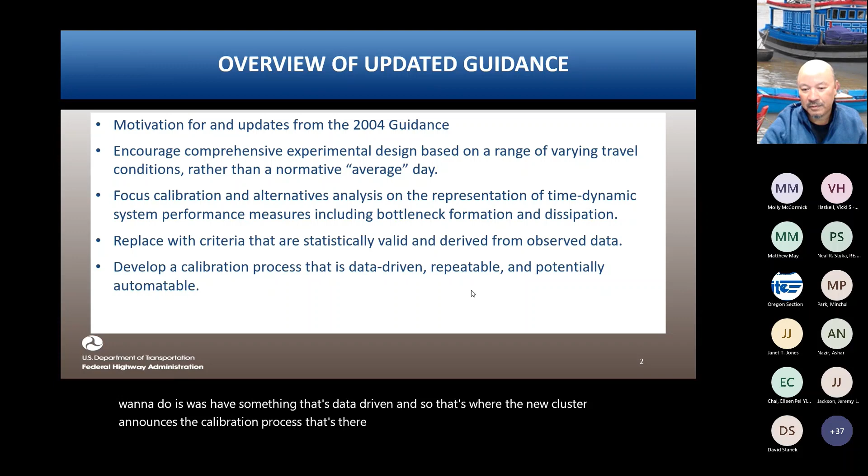What we wanted to do was have something that's data driven. And so that's where the new cluster analysis and the calibration process come in. And what we're hoping for through this process is a repeatable and automatable process. And so here's some of the motivation. Back in 2004, we were data scarce. Now there's plenty of data out there.

And now the biggest thing here is we want to get away from that average day where we're grooming the data. We're spending a lot of time on that. Now we just want to focus on what data are out there, and go from there. And then leveraging some of the new data sources, everything from crowdsourcing to commercially available data within the system. And so those are the things that we went through.

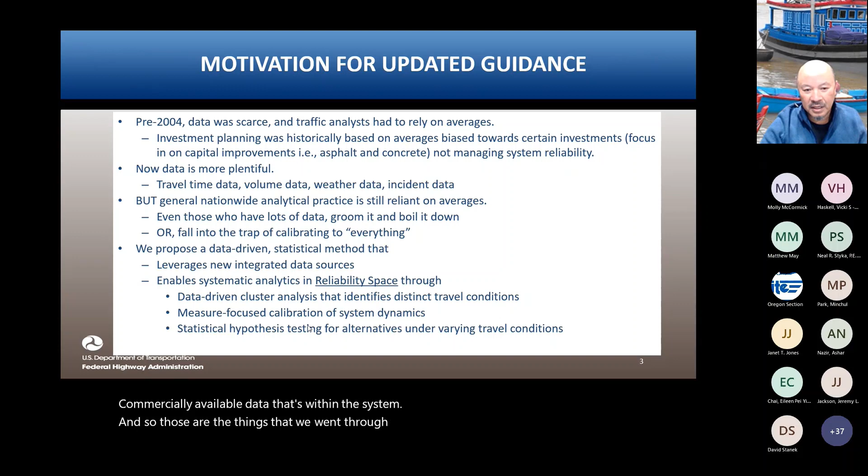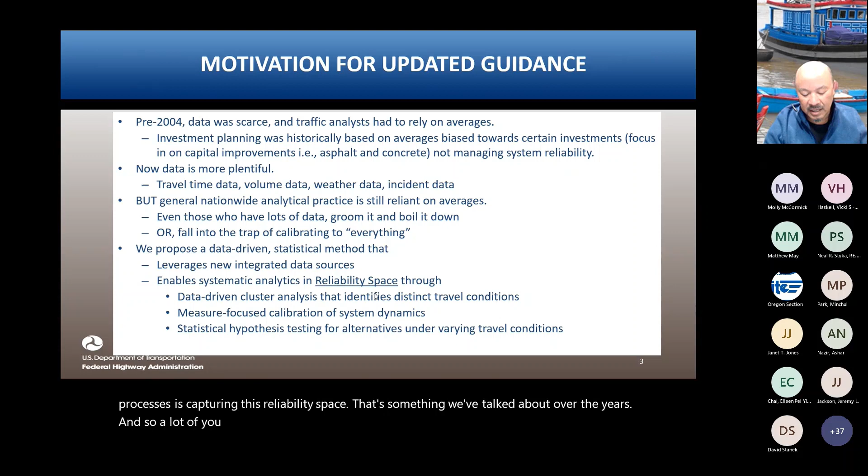And one of the big things in the new process is capturing this reliability space. That's something we've talked about over the years. A lot of the activities that you're doing with microsimulation are still focused on geometric, but the new methodology allows you to also expand into that reliability space.

And so some of the guiding principles of microsimulation here are clear objectives, hypotheses, well-defined performance. When we say objective and hypothesis, we want to get away from the NEPA process, the mom and apple pie, improving congestion, those big broad terms. We want to get into very specific objectives within the modeling process, and how we use the performance measures to vet that. Select the appropriate tool, make sure that we have sufficient budget from a resource and time standpoint, and sufficient available data.

The biggest thing that you will see in the new update is we ask for a year's worth of data, but we can live with 100 days. But we have done projects with less than that, and so it's a matter of what the objective of your project is, how much data you really need, and whether there is data available out there.

And I'll give some examples of some of the innovative ways some of the firms have gone out there and secured the data. Everybody thinks that they've got to go out there and put a tube across the highway for 100 days or a year. That's not what we're looking for.

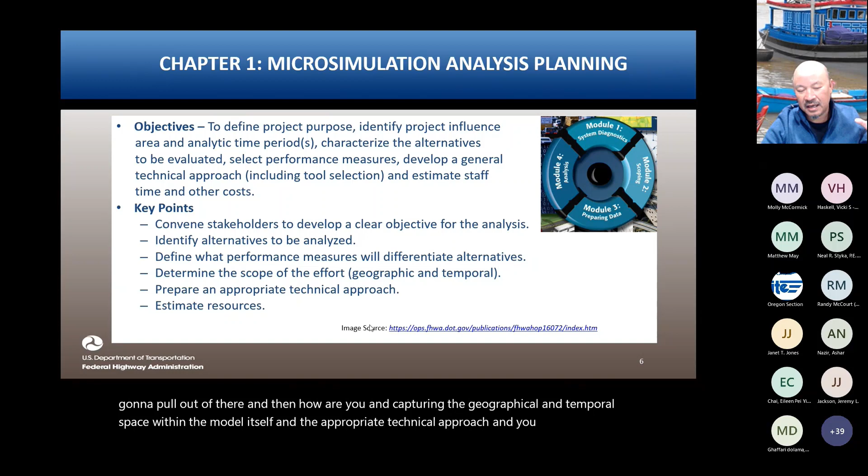Identifying how you differentiate between the no-build and the build. What MOEs are you going to pull out of there? And then how are you capturing the geographical and temporal space within the model itself, and an appropriate technical approach. Those are some of the key activities that we talked about in Chapter 1.

In Chapter 2, that's where we get into the data collection and analysis. And this is the new piece, identifying the different travel conditions within your network, and using cluster analysis to identify that. And one of the big things out of here is measure flow and estimate or forecast demand. The biggest thing that we were looking for is this concept of flow conservation. If you look at the speed-flow curve, there's a direct relationship between demand and speed.

What we want to do is capture a holistic day. And that's one of the things you'll find in the new methodology: we don't calibrate to a synthetic day, but we actually calibrate to an existing or actual day in space that has that flow conservation we're looking for, using contemporary data to understand how your system is doing.

So some of the dangers of applying a data scarce method in a data rich environment. When we did the research and updates in 2016, this is what we found: people were throwing out bad weather days, crash or incident days, and focusing all activities on Tuesday, Wednesday, and Thursday, forgetting Monday, Friday, holidays, and the day before holidays. If you throw away all those bad weather and incident days, you're throwing away over two-thirds of your data. So if you're telling the traveling public you're only analyzing one-third of the days within your network, how would they feel?

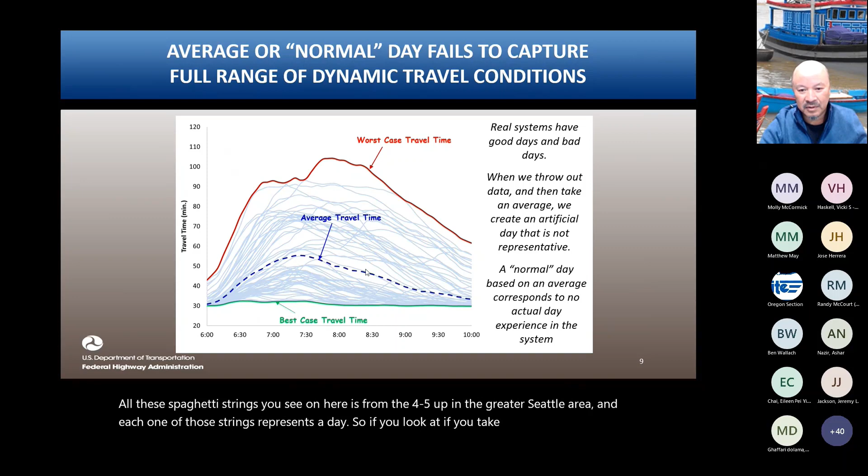Here's all these spaghetti strings you see, from the 405 up in the greater Seattle area, and each one of those strings represents a day. So if you take that average travel time or average day there, are we forgetting all the stuff above that, like the worst case or best case travel time? Those days actually occurred within space, so is it appropriate to discount that?

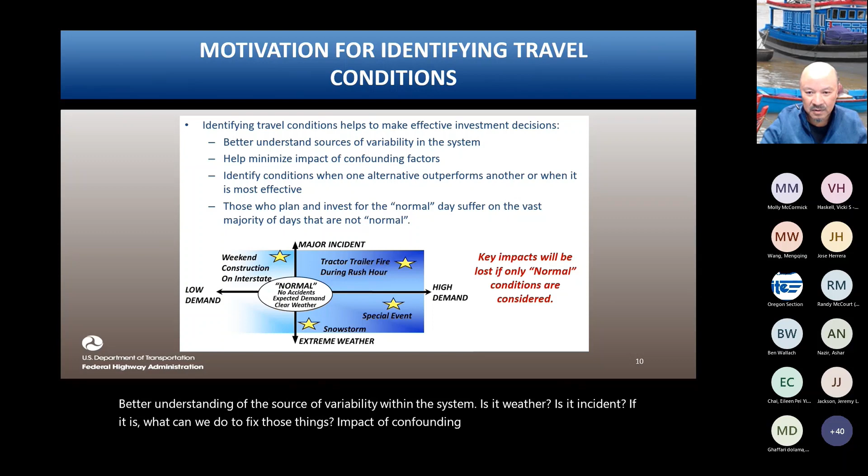That's where we were getting at, how do we capture and find all the different characteristics, and then identify which one of those clusters we actually want to execute or analyze. All the different travel data can help us make effective investments, better understanding the source of variability within the system. Is it weather? Is it incident? If it is, what can we do to fix those things? Impact of confounding factors, identifying conditions where one alternative outperforms another.

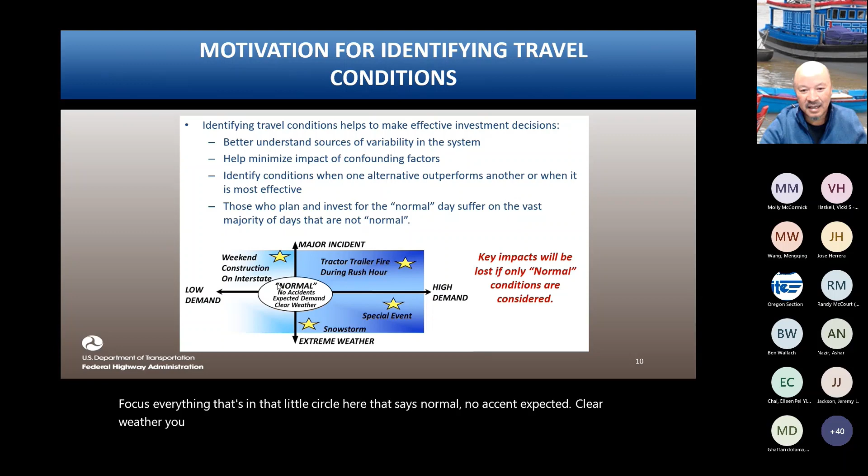One of the big things we look at in this new piece is, once you build a geometric, can you get other improvements out of it with operational strategies? If we focus everything on that little circle that says 'normal, no accident expected, clear weather' - that Chamber of Commerce day - we're only focusing on a very small percentage of the travel space. And is that right if we do that? So those are some of the things we want to look at.

With this new process where we go into cluster analysis, whether you capture 100 days or a year's worth of data - or some of the projects I've worked on in California, Texas, and elsewhere, where we were only able to get 40 or 50 days worth of data - we can still use the K-means process to identify similar travel conditions within those days, grouping them into similar characteristics so we can see what's happening on that system. All cluster analysis is, is just grouping different similar days together. That's all it is.

Observe data using cluster analysis to identify distinct travel conditions for the network itself. Once you find those different clusters, you identify what we call the centroid, or the representative day - the day that's in the middle of that cluster. That's going to be the representative day.

So what we're doing now in the calibration process is focusing everything on that representative day, with all the data associated with that day, to go through calibration. As we calibrate to travel time and bottleneck, what we've found is that the amount of time it takes to go through calibration is a little bit less, or a lot less, than it was in the old 2004 methodology, where we were calibrating to a synthetic day - a day that never really happened - and a lot of times we lose that flow conservation associated with it.

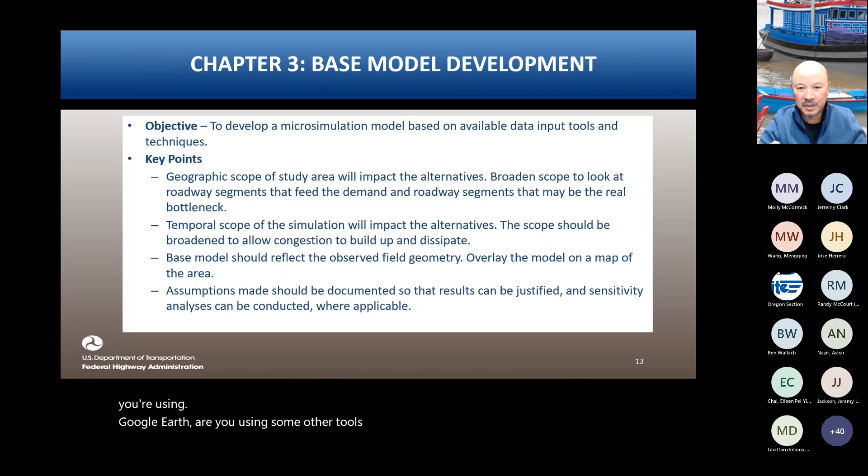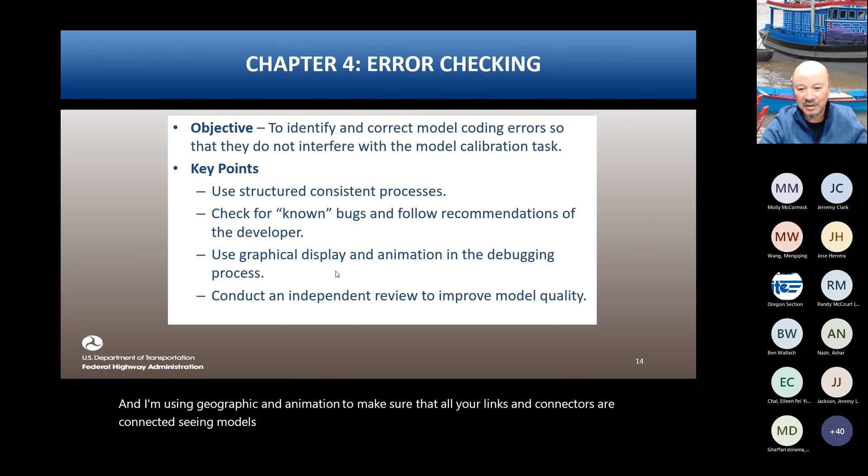The base model development in this manual is still the same. You're using Google Earth or other tools to aid in the development of that base model, and depending on the tools you use, it will dictate that aspect of it. Error checking is still the same — what known bugs are there in the software you're using? I'm using graphical animation to make sure all your links and connectors are connected. I've seen models where they just fall off into space. So that activity hasn't changed.

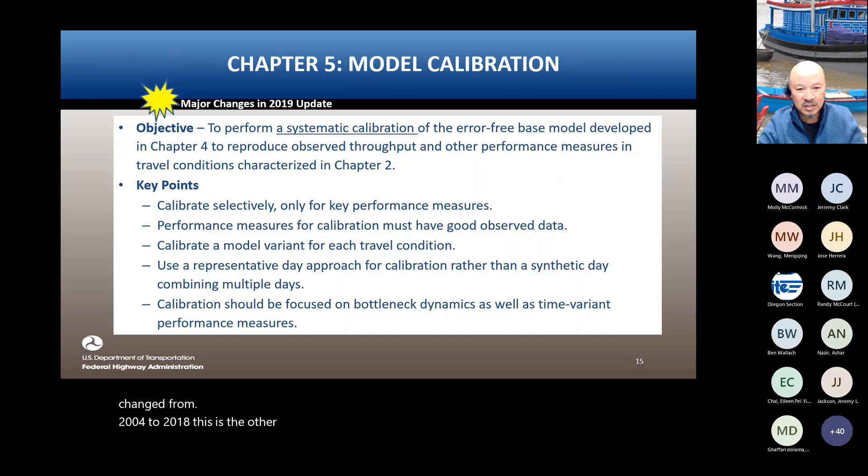From 2004 to 2019, this is the other updates that we did here. The purpose of calibration is systematic calibration.

We're turning one knob at a time to see if we can reproduce what's happening out in the field. The big thing in this new methodology is calibrating selectively — we only focus on those two key performance measures, travel time and bottlenecks.

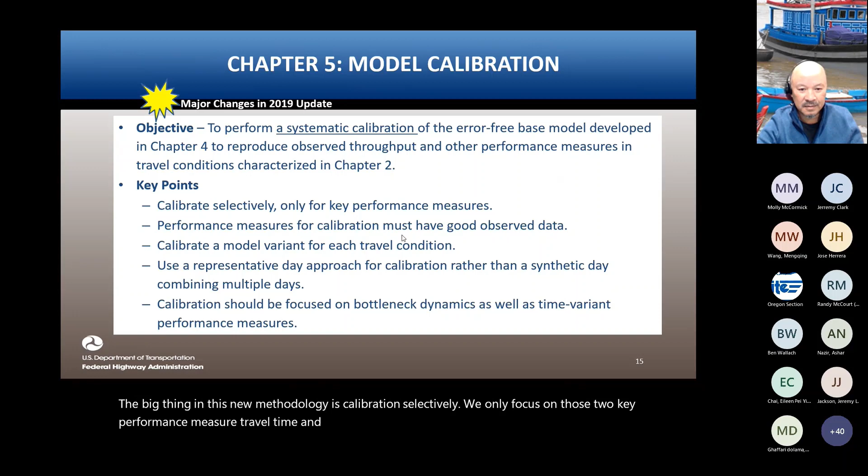Here's the criteria associated with this. We have four new criteria where we totally define exactly what they are in the updated methodology. In 2004, when we wrote that, we weren't 100% sure, so there was a lot of ambiguity embedded in the 2004 methodology, and some state DOTs took it on themselves to update those processes, combining travel demand calibration with microsimulation calibration. So now in 2019, we have an opportunity where we just focus in on microsimulation-only MOEs.

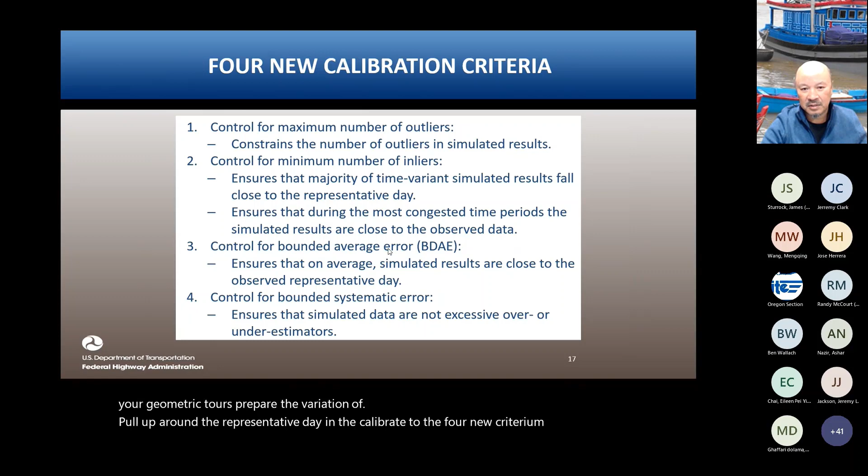The first one is we want to constrain the number of outliers in the results. The second is controlling the minimum number of inliers — that's where the 1 sigma and 2 sigma bands come in.

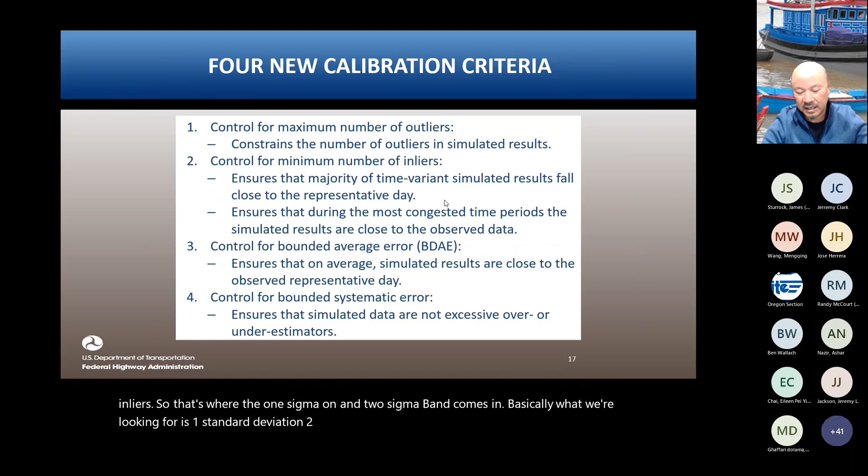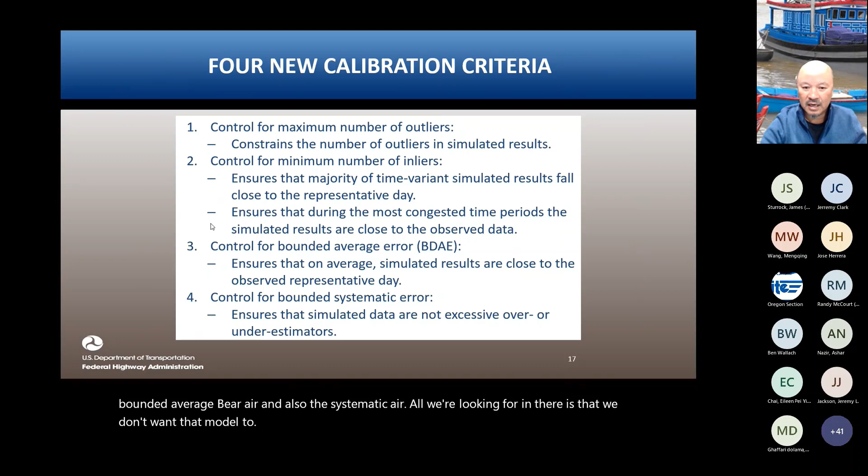Basically, what we're looking for is 1 standard deviation and 2 standard deviations from the average day in travel time. How do we build those two bands? Number 3 and number 4 are controlling the bounded average error and also the systematic error. All we're looking for there is that we don't want the model to over- or underestimate the travel time associated within the network itself.

And so, why do we need to identify the representative day? Again, this gets back to trying to capture that flow conservation that's in there.

Here's part of that representative day activity. This is not the same as the average day in the cluster — that average day is going to be somewhere in the middle of the cluster itself, but the representative day is an actual day in space that has all of the characteristics of your travel time, your demand, and all the traffic data that you have collected for that day.

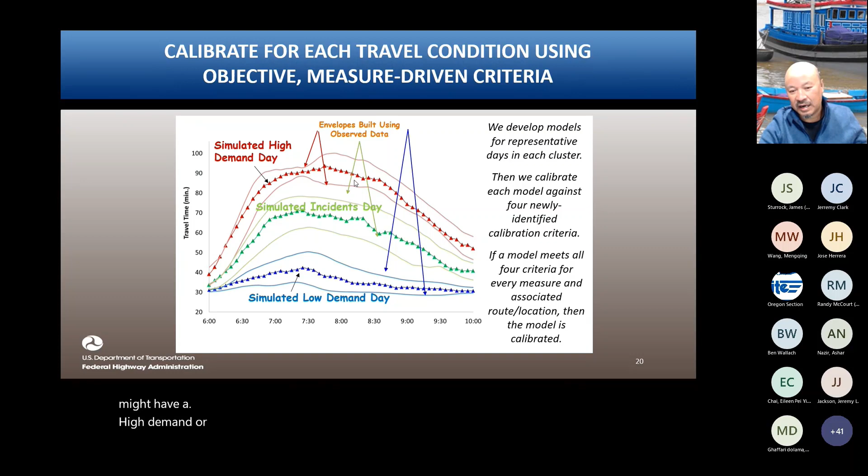One of the nice things about this new process is you can see — you might have a low demand day, you might have a medium demand day with incidents in there, and then you might have a high demand day or an incident that causes travel time to spike. So all those activities are within your model space.

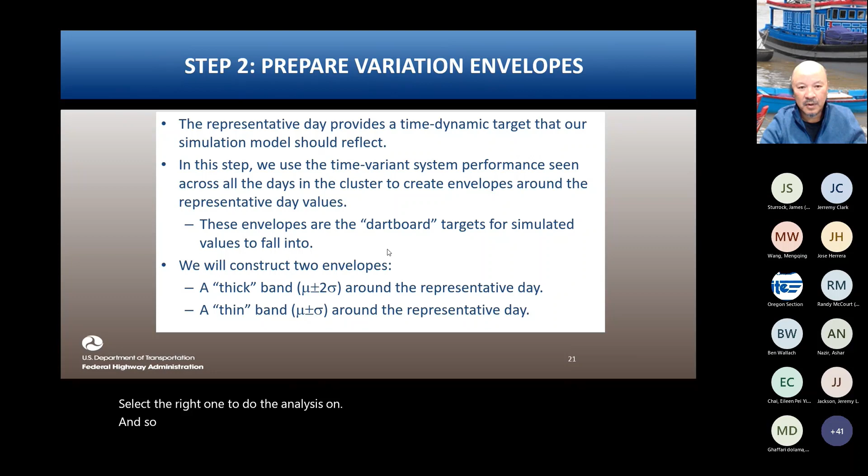So how do you select the right one to do the analysis on? The big thing here is, again, the first step is getting the actual travel time itself. Once you do that, you work through the statistical process, identifying what the standard deviation of the travel time is that's associated within there.

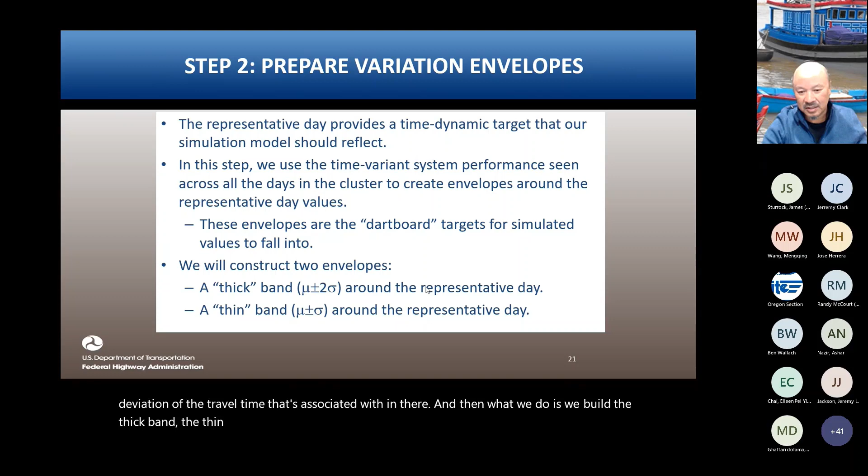Again, these are the four criteria: controlling the number of outliers, inliers, the bounded average error, and the systematic error associated with it. And the biggest thing here in the calibration process, again, is we're turning one knob at a time, looking at whether it's driver behaviors or whatever else you need to adjust within your model space or within your model.

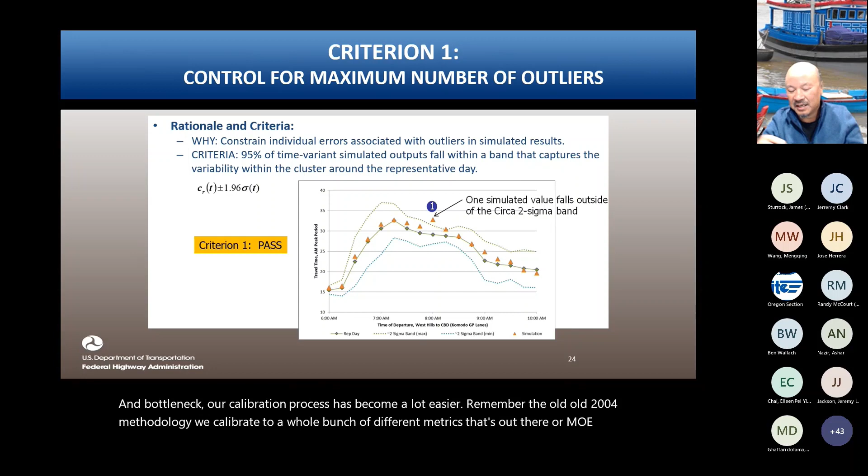You want to tweak that one thing at a time to see where it comes from. What we found in our research as we developed this new guidance document is that because we focused only on travel time and bottleneck, our calibration process has become a lot easier. Remember the old 2004 methodology? We calibrated to a whole bunch of different metrics, or MOEs, and it's like plug and dam—when you put your finger in one hole, it squirts out somewhere else. That's typical of the calibration process when we have too many different parameters out there.

So in this new criterion, the first one we're looking at here is this 2 sigma band. What we want is to have 95% of the time variant—basically the green line here with the diamonds—and your simulated time fall within that range. We want all the simulated time, at least 95% of it, to fall within those 2 sigma bands.

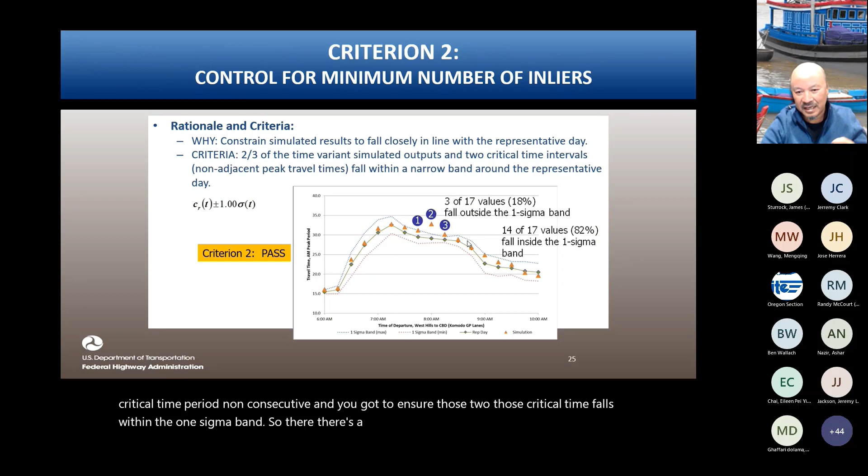And then the same thing here in the 1 sigma band. We're looking at 2/3 of it, or 66%, with the caveat that you also need to pick a critical time period within that model space. You identify 2 critical time periods, non-consecutive, and you need to ensure those critical times fall within the 1 sigma band. So there's a little caveat to criterion 2 in there.

And criterion 3 is the bounded average error. This is the rationale behind it: on average, we're looking at whether the results are close to the observed data, so that we don't have an overestimation or underestimation. And it's based on the absolute values within the model, or within the error itself.

Criterion 4 is the systematic error. Again, what we're looking at is not excessive over- or underestimation of the travel time associated with it. So there are 2 checks in there at the end for criterion 3 and 4.

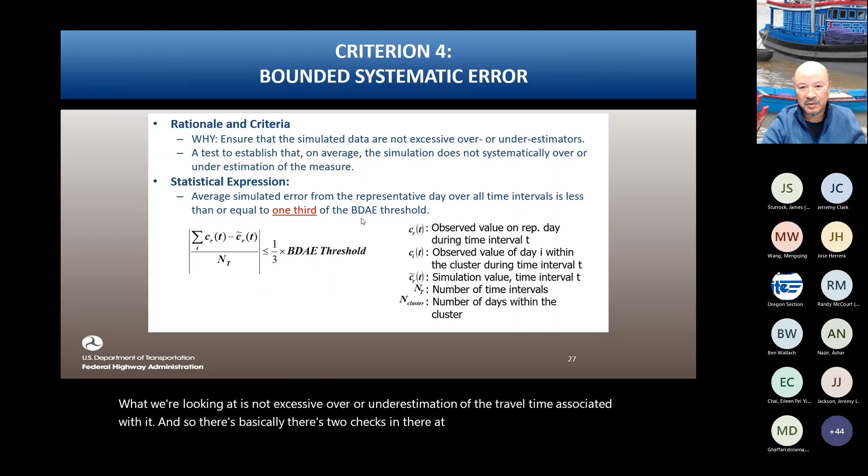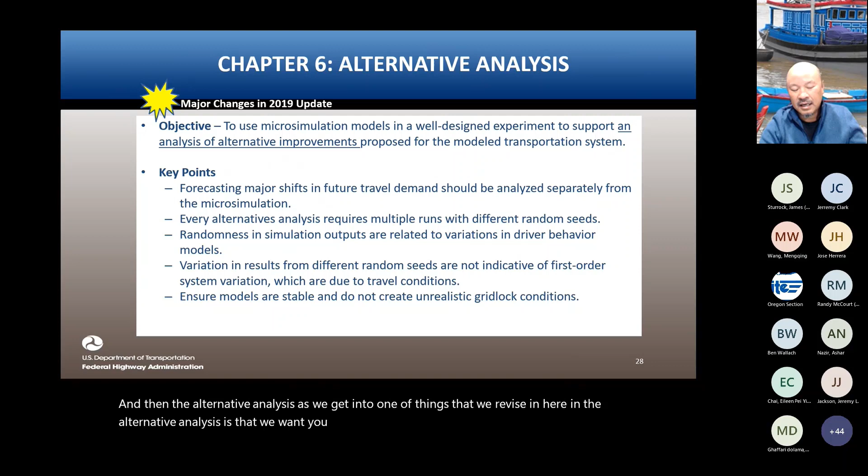And then the alternative analysis—one of the things we revised here is that we want you to go through and use statistical analysis to say that, using the null hypothesis, you have no reason to dispute the model itself. That's the key point, using some of the different statistical analysis.

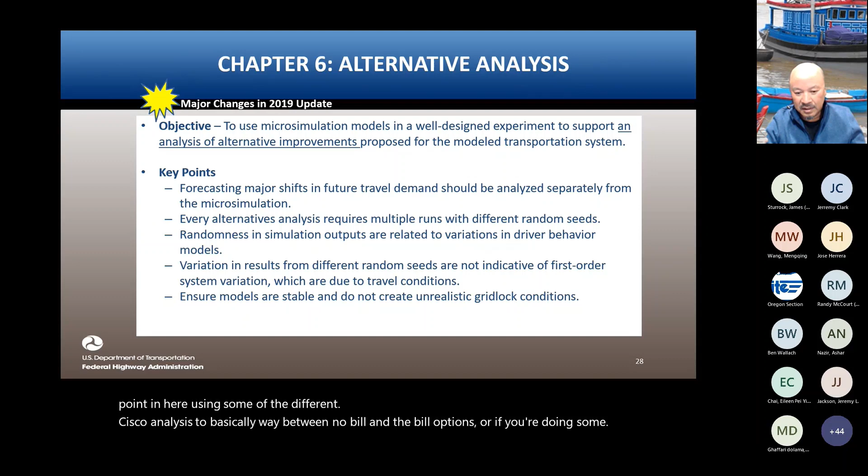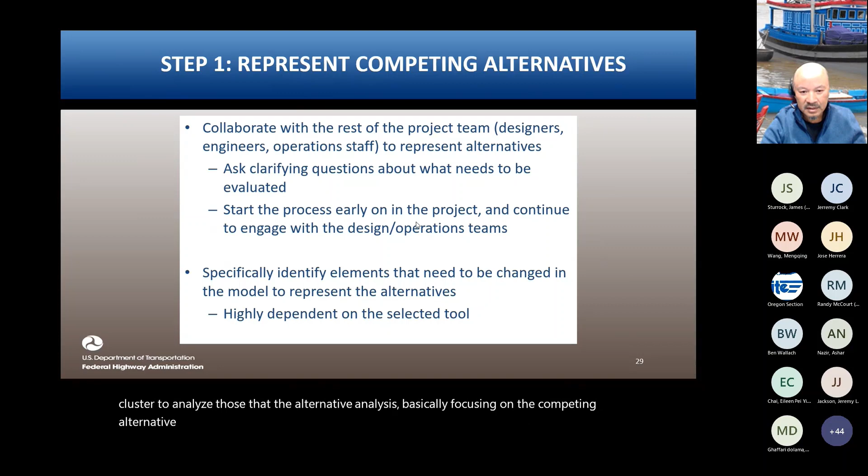Basically weighing between the no-build and the build options, or if you're doing operational improvements or whatever, you can still use some of those other clusters to analyze the alternative analysis, focusing on the competing alternatives that are there. So that's all we talked about in there.

And the number of model runs—this is a little bit different than the old methodology. In the old methodology, when you do the calibration, you do a whole bunch of different runs to get an average across them. In the new methodology, in our calibration process, we do only one run.

The only time we do multiple runs is in the alternative analysis. One of the things we also look at in the alternative analysis is understanding what is the error tolerance of the data in the field, to allow you to set up that null hypothesis and identify the number of runs that satisfies that 95th percentile confidence level.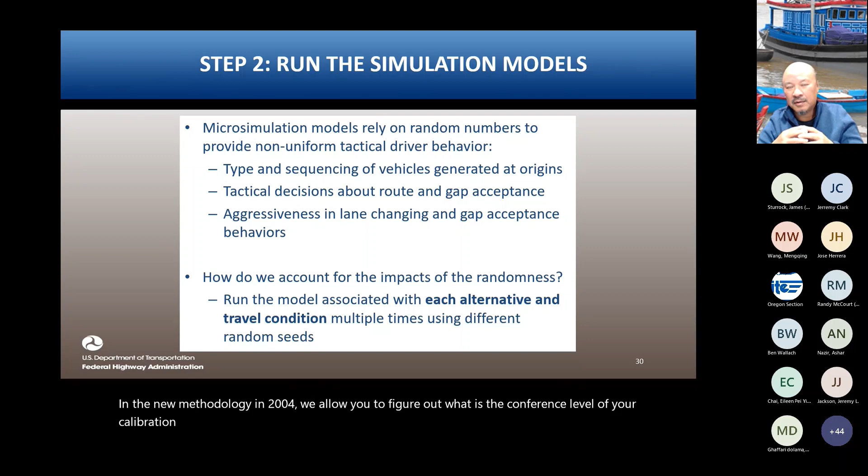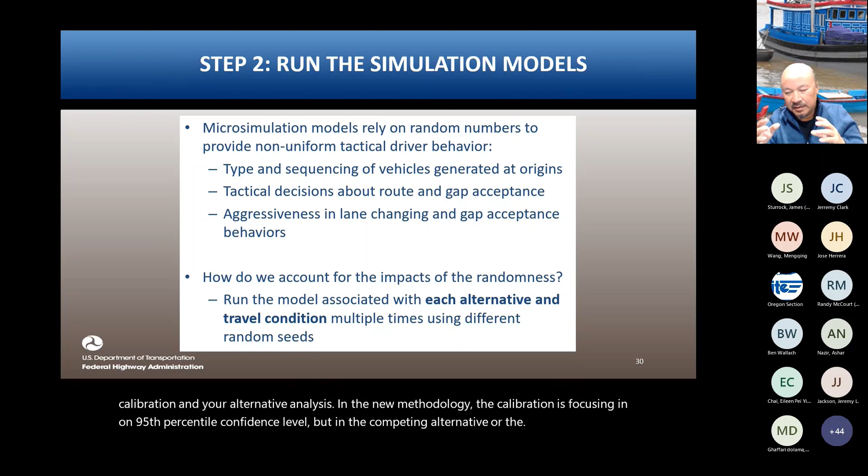Or, in the new methodology compared to 2004, we allow you to figure out what is the confidence level of your calibration and your alternative analysis. In the new methodology, calibration focuses on the 95th percentile confidence level, but in the competing alternative, or alternative analysis, we allow you the flexibility to identify what is the confidence level of the results you're looking for.

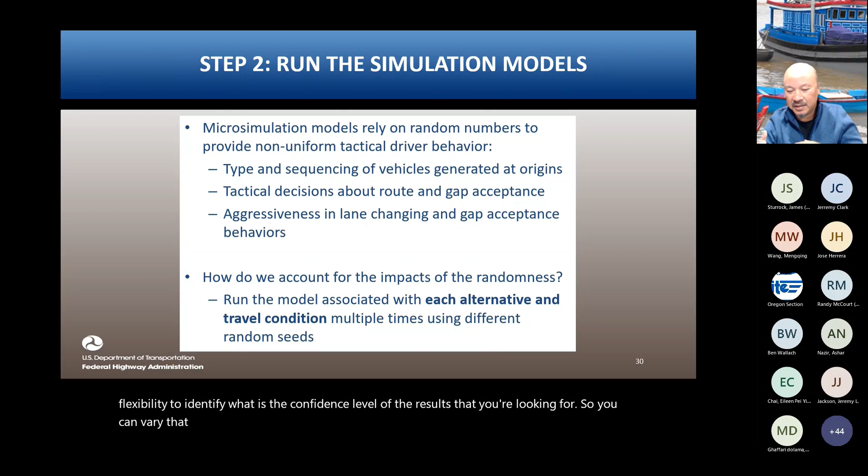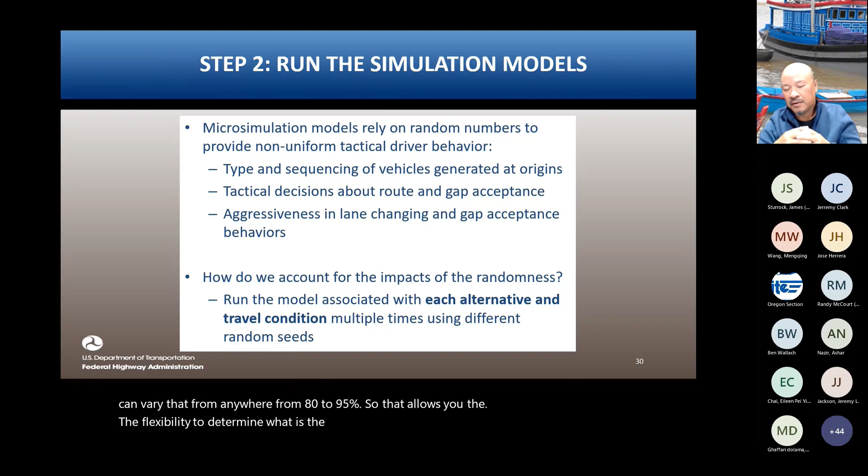So you can vary that anywhere from 80 to 95%. That gives you the flexibility to determine what is the appropriate number of runs for each of the outputs, or the results of the model itself. And here's just a basic number.

So there's some minor differences in the analysis that's in there, and you go through and calculate the null hypotheses. Can you reject or not reject the analysis that you have done?

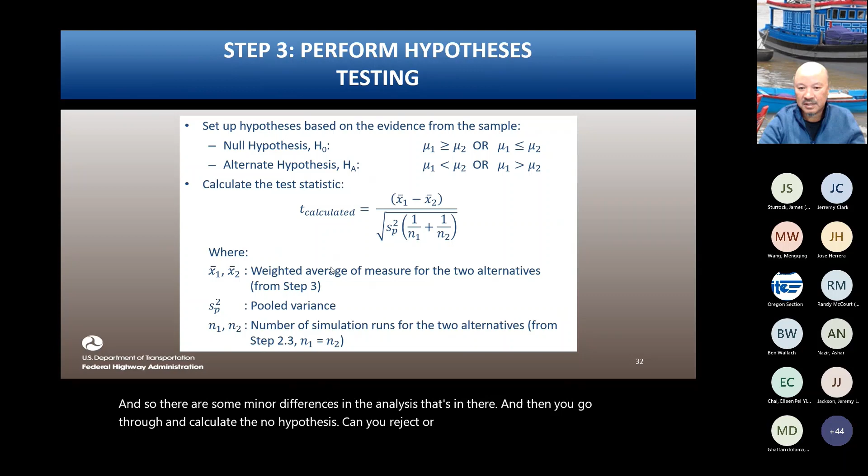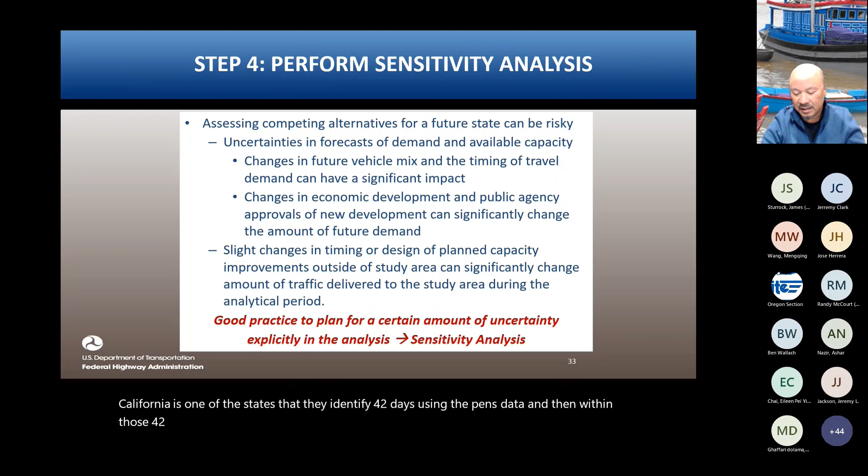So in the system, the sensitivity analysis, one of the things I've done with some of my state partners or stakeholders is that they select a predominant cluster. Let's say California is one of the states. They identify 42 days using the PEMS data, and within those days, they found that one predominant cluster had like 20 some days out of the 40, over 50%.

And that's what they're going to base their geometric improvements on. Some of those other minor clusters, they had some high demand cluster in there. So now that you have that data, when you do the sensitivity analysis, instead of just varying the demand arbitrarily by 20% or whatever, now you have actual data in the field that says the high demand day is 18.7, or you can use that cluster to do the high demand calculation, a brief calibration, because you've already done most of it in the predominant or dominant cluster. Just some minor tweaking in the high demand cluster, then you can say, based on the data that's out there, the high demand time might be 25%, maybe 30%, maybe 15%, whatever it is. At least you have data where you're not just putting an arbitrary number in, where you're using a real number that came from the data itself. So that's some of the other nice things you get out of this.

And then of course the last chapter is our final report, where you're just putting together how to tell your story. Some of the ongoing efforts we have right now: we're doing a case study in Minnesota, Colorado, and Florida with one of our contractors. What they're doing is taking 3 projects, one in Minnesota, one in Colorado. Minnesota I can't remember the location, but Colorado's C470.

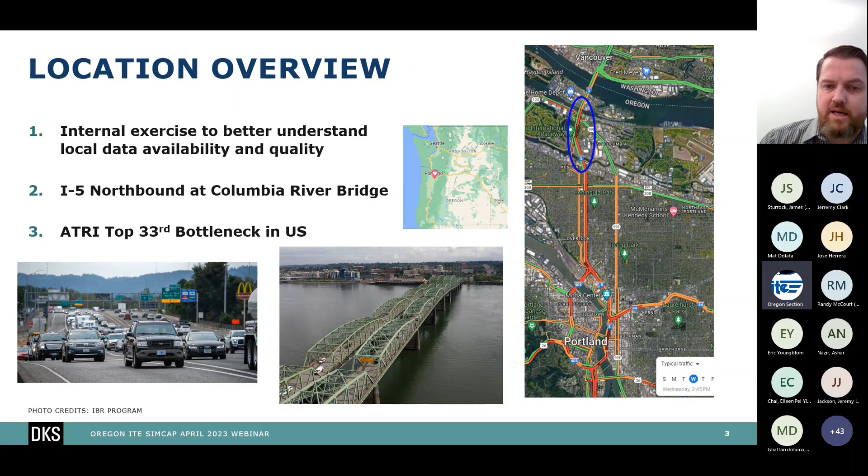So for the data that we have, we utilized free data sources that we have in the Portland metro area. Portland State University has a system called Portal. It's a transportation data archive. That allowed us to get mainline and ramp volumes for the freeway, as well as speed data. And then through NOAA, you could get weather data that includes weather, precipitation, visibility, and wind.

And then ODOT has an incident data set. So there's certainly additional data sets that you can apply to cluster analysis. This is just what we had readily available. We also focused on a relatively narrow time period, looking at non-holiday weekday PM peak between 3 to 8 p.m. And then through that, we developed measures of VMT, vehicle hours traveled, and vehicle hours of delay, and we developed all these dependent variables through these data sets into a database.

And then probably the most time-consuming part and the most important part is cleaning the data. So you want to make sure that you do that full data validation. In our case, a lot of the detector records had gaps in the data. So we had to go through, toss out those days that had substantial gaps, and just go through that sort of general cleaning process. In the end, we ended up with about 160 days of observations once we got rid of all the bad detector data. Because in one day you may have one detector bad, on the next day you may have another. So understanding those gaps is really important.

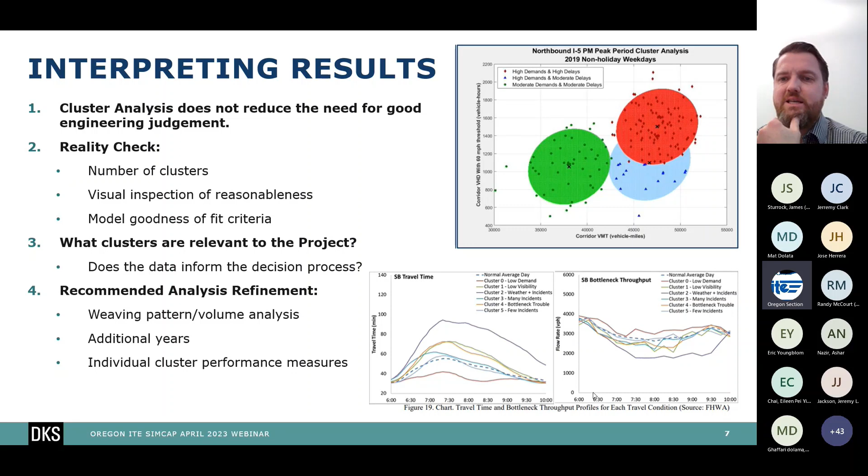So the plots here in the lower right come directly from the FHWA guidelines, and it's showing the travel time and bottleneck throughput over a full day. And you can see for the individual clusters what those results are. So if you could isolate that in the data or simulate that, it just allows you to get a better understanding of the details related to a particular cluster.

So a few key takeaways here. Ultimately, cluster analysis is going to help you provide a deeper understanding of your corridor operations. So you can answer all kinds of questions. How many days a year are impacted by weather or incidents? How many days of a year have high versus medium versus low congestion?

Through Dave Stanek's question and the response we were just having about validating traffic count data, we could certainly use the cluster analysis, and we have a set of counts for the entire corridor. How do the counts that overlap where we do have the data fit relative to the cluster we're interested in? So there's a lot of good questions here you can answer just by doing a corridor study, diagnosing a corridor, even if you're not going to be taking this into modeling. So I think that's a big takeaway, is this isn't just for developing model input volumes.

Cluster analysis also helps us select the right data for the analysis. You certainly have to do the data cleaning and the validation. That's incredibly important. And ultimately, it's going to help you reduce the risk of creating a calibrated model that doesn't necessarily match field observations or expectations.